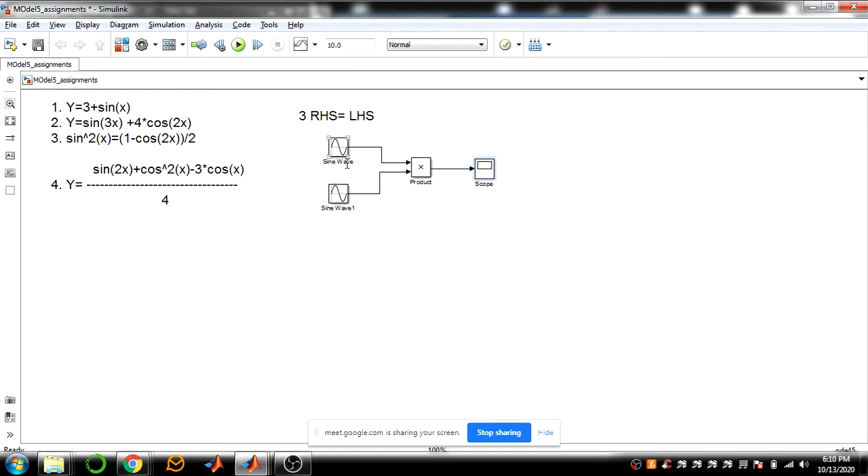Now let me change this parameter setting to 1 second, and the frequency should be 2 into pi, to get it in terms of hertz. The frequency is 2 star pi star 1.

If you simulate this, you will get the RHS side of the output. Let me do this. So this is the output you are getting: sine into sine, sine square of x. So you will get a 2 hertz signal, almost.

Any question on this? How do we get this? There are other methods also. You can use some other blocks, instead of product, to get the sine square of x. You can do the mathematical operation like power operator. Using that also you can get the similar output.

Frequency, yeah, only frequency is 1 hertz, so I'm setting it as 1 hertz only. So it's 2 pi into 1. For both it should be same, sir. Okay, okay.

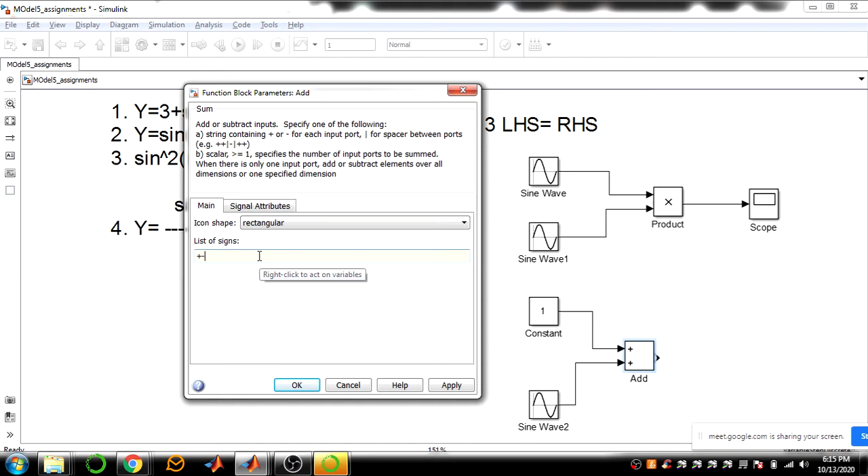Second one should be minus. So then apply and okay. So now you can see here plus and minus. So this will be negated and this will be positive. So now you have made 1 minus cos of 2x.

So the result of this one should be divided by 2.

We can use that, we can use that also sir, we can use that also. Okay, fine.

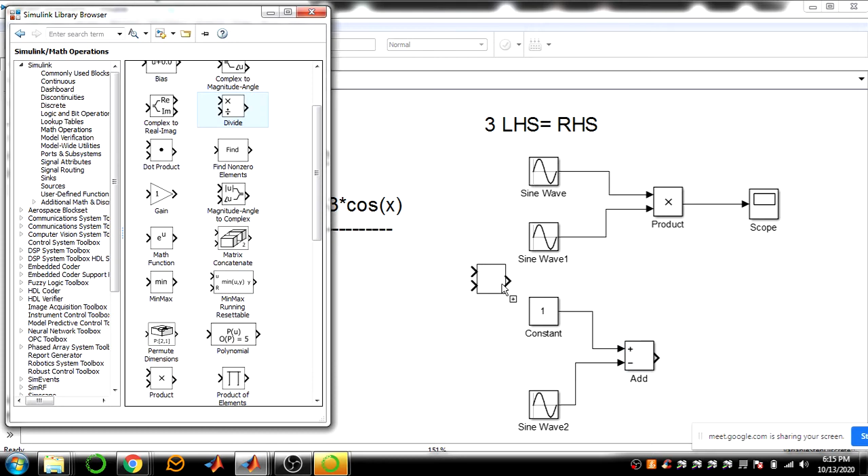So next we will divide this by 2. Go to the divide block. You have a divide block, drag and drop here. So this is the multiplicand value, that means this is going to be numerator, and in the denominator we should have a 2. So again we need a constant block. I'm making a copy of that one, changing the value to 2, and then connect it here.

So you will get 1 minus cos of 2x coming here, and this is getting divided by 2. So then you need to see the output, connect it here, and now run the simulation.

So I'm getting this output here. So this is another oscilloscope.

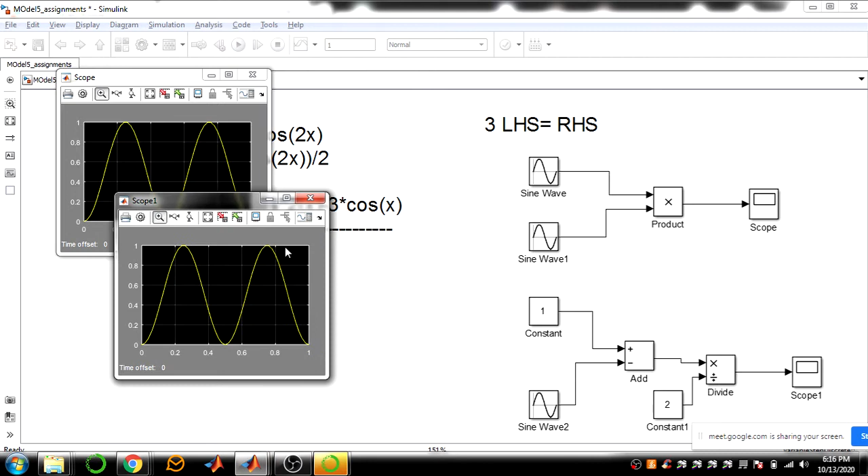So now totally you have 2 outputs. Okay, so both outputs are same, that means we have proved that LHS is equal to RHS. Any questions on this one?

Where, here in division, or here, right? See, it will get multiplied, so that means this will go to the numerator part. So you need to divide this value by 2, right? 1 minus cos of 2x, you need to keep it. It is like a will be multiplied, okay, and b will be divided. That means it is going to be a divided by b. Here you are getting the a term, consider, and this is the b term you consider.

So what will this make? It will be a divided by b. If you want to make b divided by a, you need to connect this b line to the multiplication symbol and the a line to the division symbol. Fine, any other doubts?

Yes, you can solve it. Yeah, you can solve as many models as you want, you can create it here, sir. So there is no end to that.

Okay, so fine, this is one example. Please try other examples if you're not able to complete it.

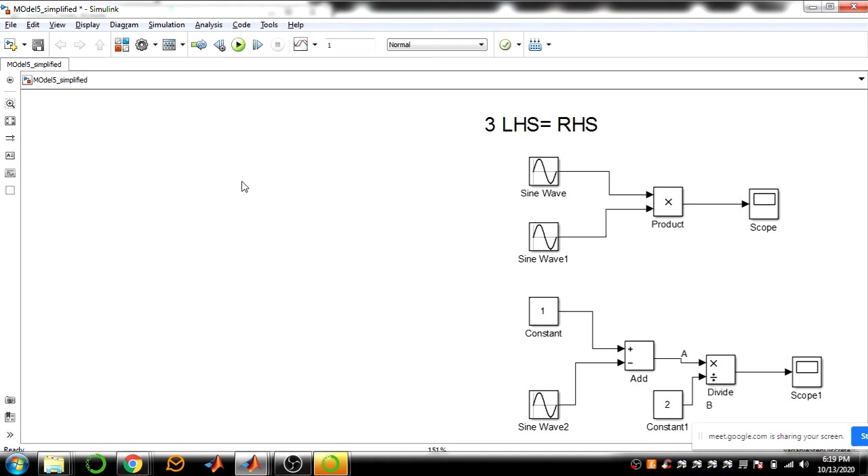So you can select the block and drag them wherever you like to have it. Okay, so now I'm going to simplify this model.

How do you make the parallel connection? I can draw a line from here and connect it again back to here. So that means there are two signals which are coming as sine. So now you are doing the same thing, sine into sine only you are doing it. So if you have any question, let me know regarding this.

You can draw parallel lines like this from wherever you want. So this is one way of drawing the parallel line, that is a reverse connection. I'm connecting from this end to this end.

So another alternate way to connect is, if you want to draw an extra line from this one, you can select that line, hold the control button, and draw the line from wherever you like to. So this is how I can draw it, this way also I can make the connection. So both will give the same result.

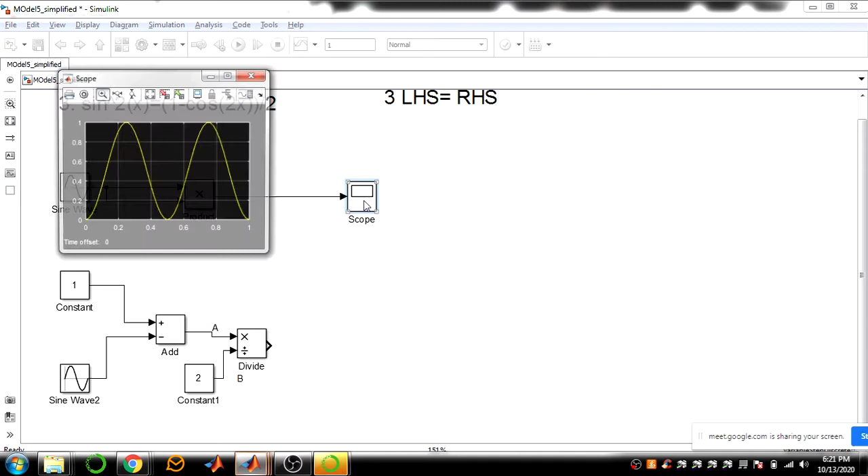So what I can do is double click on scope, and go to the parameters here in oscilloscope, parameters.

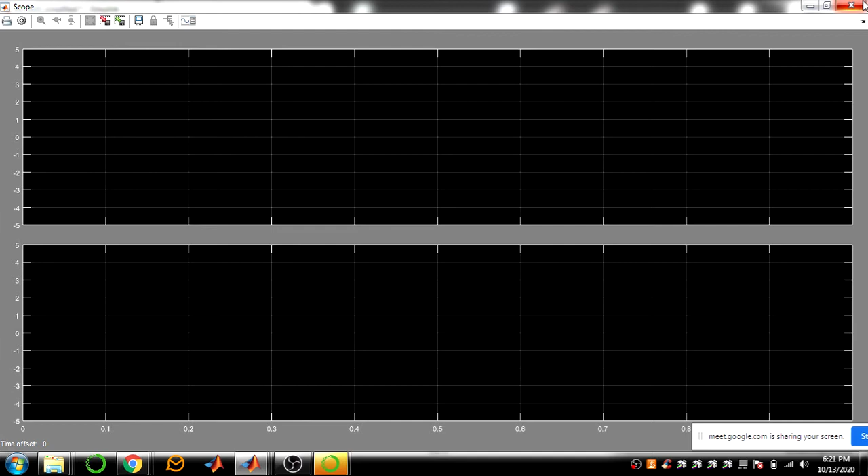So the number of axis option is there. Make it 2, then apply, then OK. So you will be able to get 2 axes. I have connected one of them already here. Let's connect this output here too, so you can easily check the final result and do an automatic comparison. I'll just auto scale it. See, both results are coming same.

See that, so we reduced the model, right? Earlier it was looking a little bit bigger. Still, I'll reduce it a bit more here.

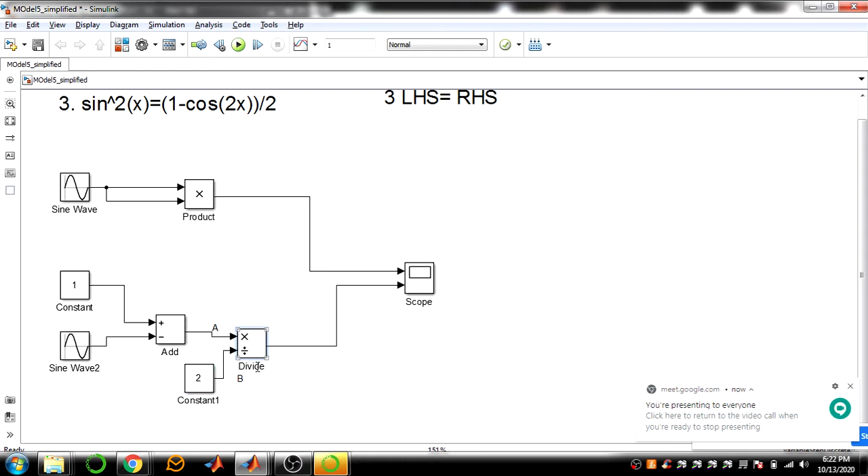See, now I need to divide this incoming output by 2, right? So instead I can remove this divide block.

So what I'll do is take the math operation, the gain block, and drag and drop it here. This will actually multiply the incoming signal. Whatever the input signal is, it will simply multiply with the constant value. So if your constant value is 2, it will multiply the signal by 2. That means this equation becomes 2 into 1 minus cos of 2x.

But what I need is 1 divided by 2, so let's multiply this with 1 divided by 2. Let's do that. You'll get a final output which is the same as previously, no changes in the result. So now the model has been reduced a bit.

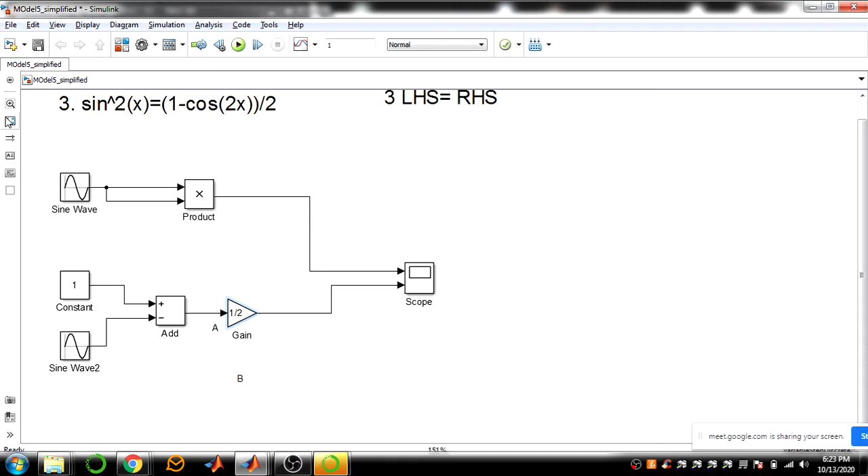So any questions on this?

Rakshita, have any questions? Sajid? Reshma, you joined late, okay, no problem. Harish sir, do you have any question?

Fine, fine. Okay, so let's move on with some other options here.

Here I'm going to show you about connecting multiple signals to the same scope. Apart from modeling this equation, we also learned connecting multiple signals to the same scope, and how to draw a parallel line from the same signal. These are like your electrical signals, electrical wires—you can make serial connections and parallel connections like this. You can draw as many connections as you like from this point.

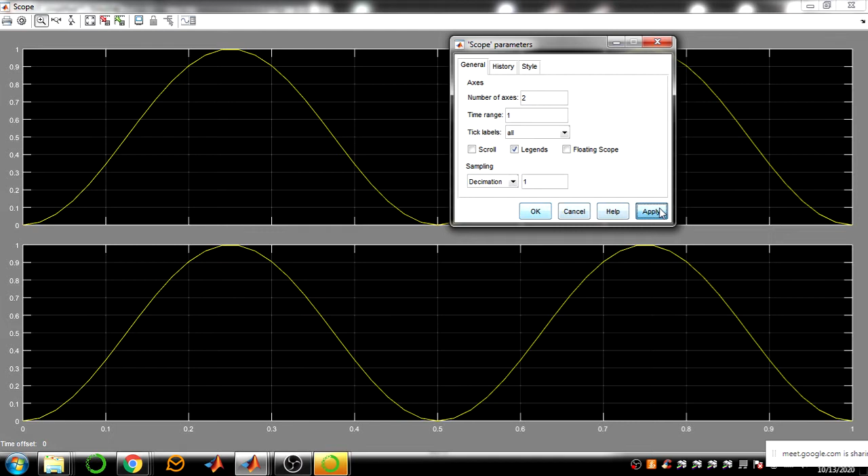You can see here it is showing the product and gain. What it's showing as the outcome is basically the name of the last previous block—that name is shown as the signal name.

If I write something here, this is going to be considered as a comment or naming. Say, here I'll write LHS, and here I'll write RHS.

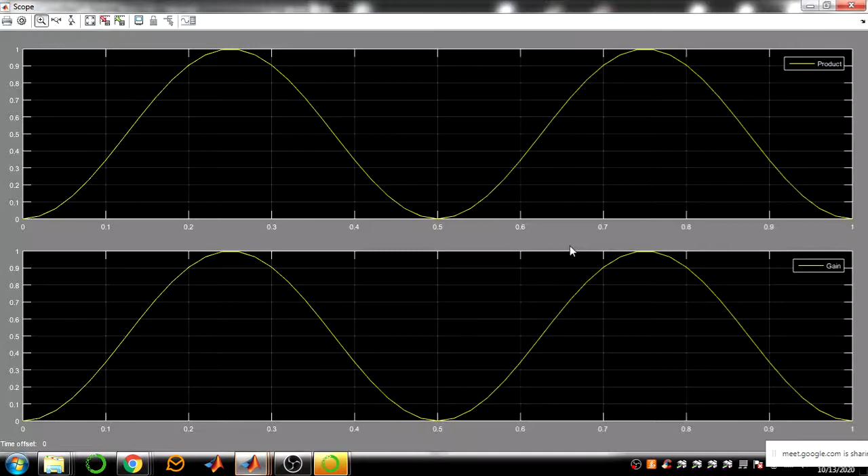What is this—will it show this on your signal? No, right? So it's showing here whatever the name of this signal is. So if you want to name this particular line, here's what you can do.

You can select the line and double click on that line. Then if you name it LHS, it is actually the name given to this line. This will always be considered for this line only—you cannot edit it straight away. So select the line, double click, and name that line RHS.

So now if I run it, the same names appear here: LHS, RHS, LHS and RHS. That's how we can control the labeling of the signals. To name it, select the line and double click on the line to name it.

Fine, so that's some introduction about these signals. Any queries? No queries? So we'll move on to the next example set.

So, like, if we have a signal generated in MATLAB, okay, let me show you—I have this signal.

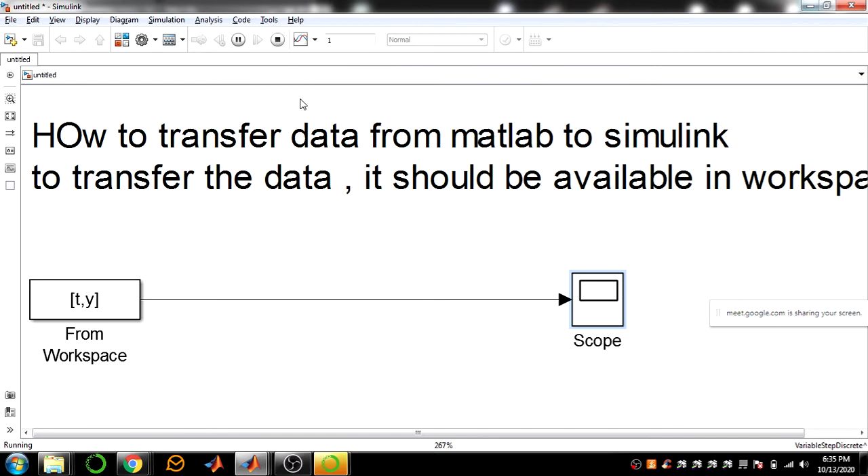Let me simulate it once and see the output. If I auto scale it, you can see this output. So is it looking like a sine wave or not, Rakshita? So then what is the problem here?

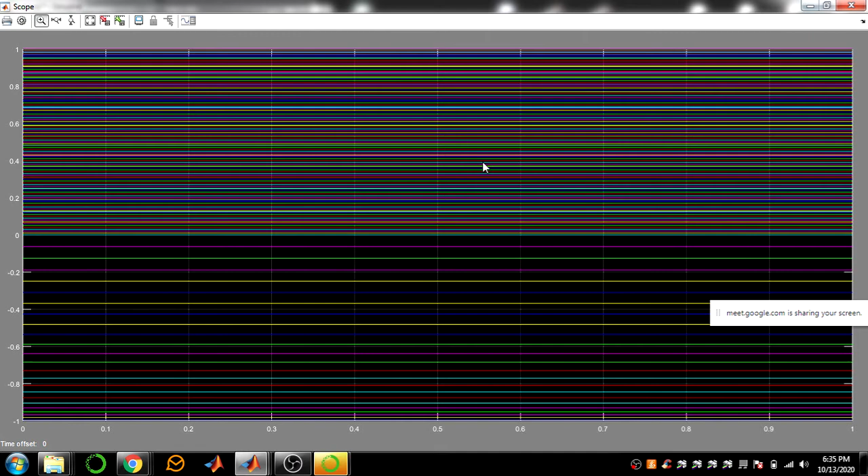The main problem here is, if you look at the signals inside Simulink, they generate the signals in a column. The data will be available in a column vector. You can see that - this T out is the variable from Simulink, and this variable takes the data in one column and multiple rows. But when we generated it in MATLAB, we gave the data in one row and multiple columns. So we need to transpose this data - bring the data into a single column in order to plot it inside Simulink. Only for the plotting purpose we need to transpose it this way.

So we need to transpose the data, that is, we write y is equal to y transpose and t is equal to t transpose. Either we can do it here using the transpose operator, or you can do the transpose operation inside the simin block itself. I'll do it here itself: t transpose, comma y transpose. So then apply and click OK. Now if you run it and click OK, you can see the final output.

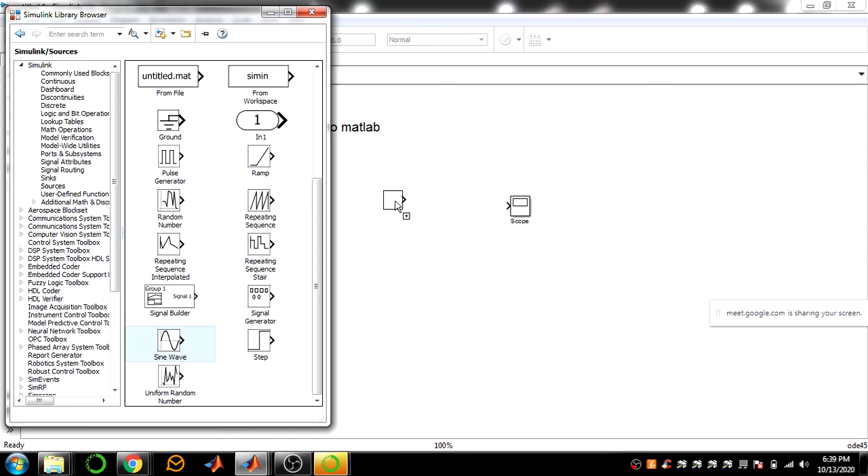So let me take a simple sine wave block. Let me have a scope block and then sine wave block to do the plotting. So let's see whether we'll be able to generate the signal or not. Frequency 1 Hertz, so let us multiply it by 2 pi and then apply and OK.

So let me run it for 1 second. So we got this sine wave as output. Okay, save as 7 underscore MATLAB, Simulink to MATLAB.

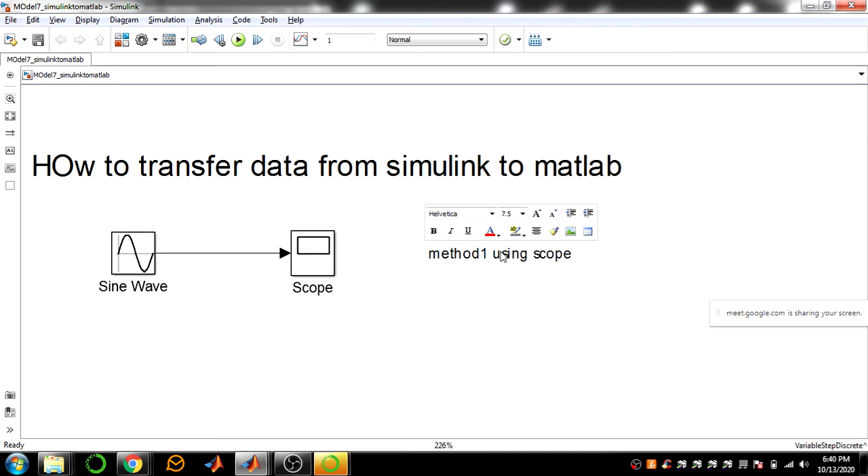So I'll show you, this is the first method, method 1, using scope parameters, that is data logging.

So how to change the Simulink scope properties, Aishwarya? To change any properties, what you will do first, you need to double click on it, then go to the parameters. Okay, so what are the options here available? General. Okay, so you should go to the history here. Okay, see, you have this option. Can you see this? What is this option?

Okay, just click on that. So what is the way, which data you want to save it? So how many signals are there in your axis, one or two? Only one, so then you can change the variable name which you want. Okay, say like I'll take the name as sine, or I'll take it as y, yes, that is y from the Simulink.

Okay, data formats, what are the formats available? Tell me. Array. Okay, then array, so array, if you are using it, if you use array format, it will store only the signal, that means sine wave samples will be stored, it will not store the time axis. But if you take structure, it will not store the time axis. It will also store only the signal axis, but structure with time means it will store the time as well as the data points also.

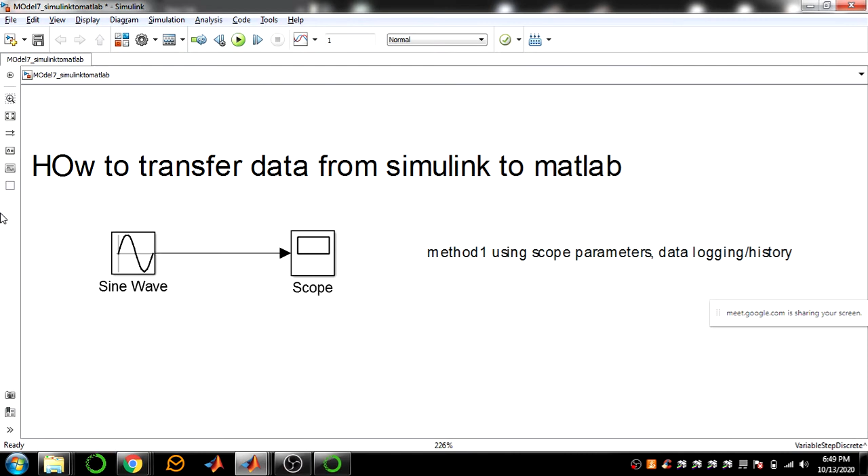So that is one way we can do it, and another way I'm going to tell you here. One second. So this is one example, another one.

So this is only when we have a scope block. Let's say I don't have a scope block - in that case, what will you do? Say I have another block coming in between, let's say a math operation block is there. Let me add a simple gain block, with a gain value of 5.

Now Adarsh, tell me how can I get this output data transferred to MATLAB? If I'm transferring using the scope block, what happens? I get the final output, right?

If I open it here and go to parameters and history, it automatically renamed it as ys1. Then apply. So if you run it, you'll be able to get the final output, that is ys1, which is the multiplication by a value of 5, so that multiply maximum value goes up to 4.22.

But what I want is to get only the output before this operation. I want to collect those samples. How do you get it?

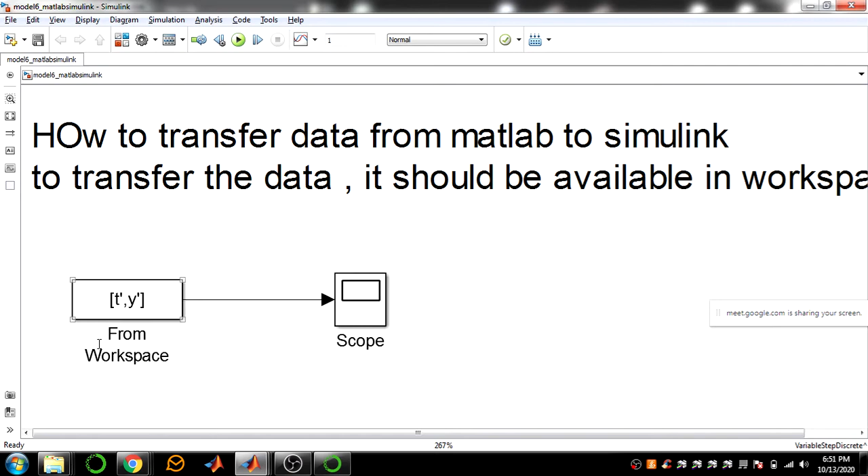That's the extra time consuming task. To avoid that, if you want to collect data, just like we had a sim-in block here from workspace block, we have a To Workspace block also. Let's see that.

Sources... now sinks, To Workspace, there is a sim out block, so I can take it. Either if you don't have a scope block, you can directly connect it here. But now I want to connect it in between. Let me connect it in between. So using this To Workspace block, I can send data to the MATLAB workspace.

If you want, you can change the variable name. I'll select it as YW. Here also you can choose the format you like. I'll select the array format. Then apply, OK, and run the simulation.

So you have the YW variable which collected your samples, Y sample. This is before you compute the multiplication, that is the gain operation, and this is after doing the gain operation. So this is using the scope block, and this is using the To Workspace block.

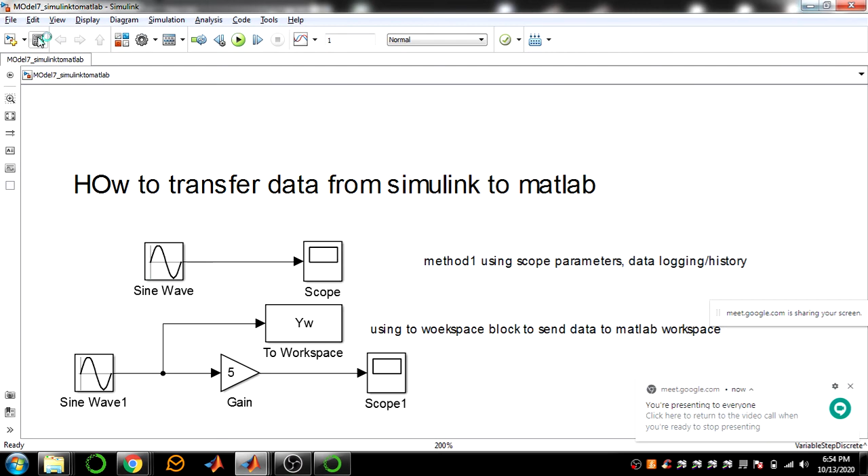Let me show you how we can generate multiple frequency outputs using a sine wave block. So I have a scope block and a source block, where I took a sine wave block. Connection done.

Do not give spaces when you are using the file name. So here I'm generating these signals up to 1 second.

I'm going to the simulation model configuration parameters and changing the step size to 0.01, instead of the normal 0.02. So now I'm generating it as 1 by 100, more number of samples. Apply and OK.

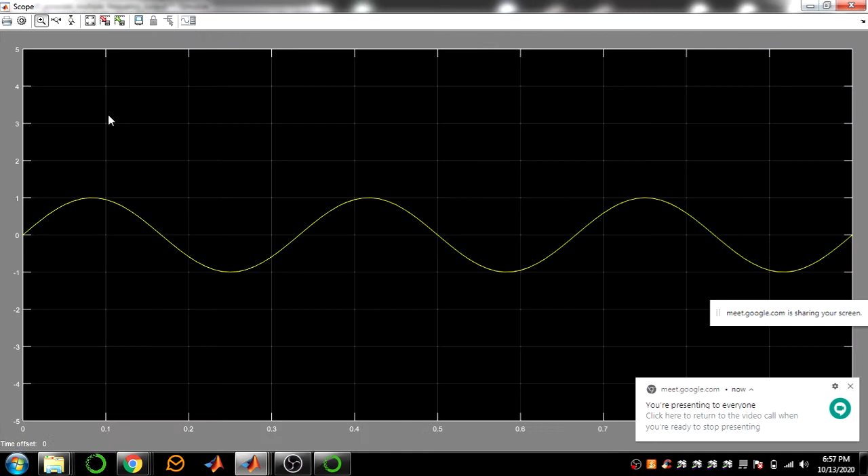Step size is 0.01 I've taken. Now if I generate this with frequency as 2 star pi star 3, what is the frequency of the output signal? So what is the frequency of the output signal, Mamata ma'am? 2 pi into 3, what is the expected output? It's going to be a 3 hertz signal, right? So we've got a 3 hertz signal, which has generated a signal with frequency of 3 hertz.

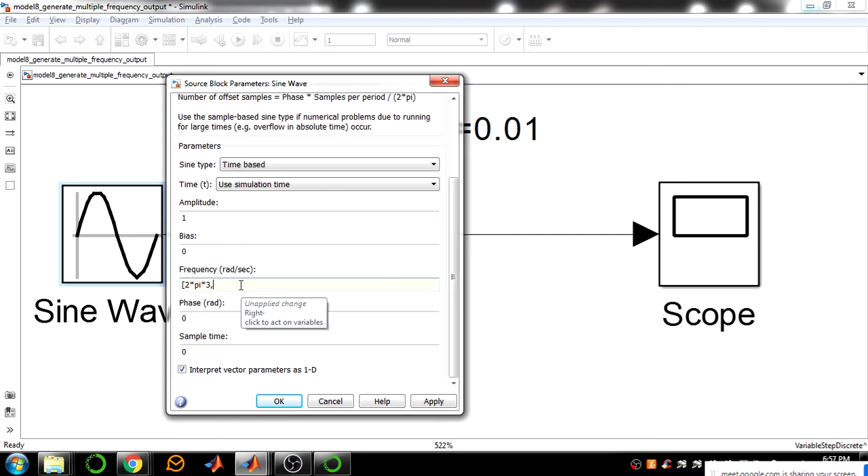Say you want to generate more signals, you can also do that. How? Here I write it in square brackets: 2 star pi star 5, comma, 2 star pi star 1. So here I'll be getting a total of 3, 5, and 1 hertz signals, total 3 signals generated. Apply and OK. You should write it in square brackets in a matrix format.

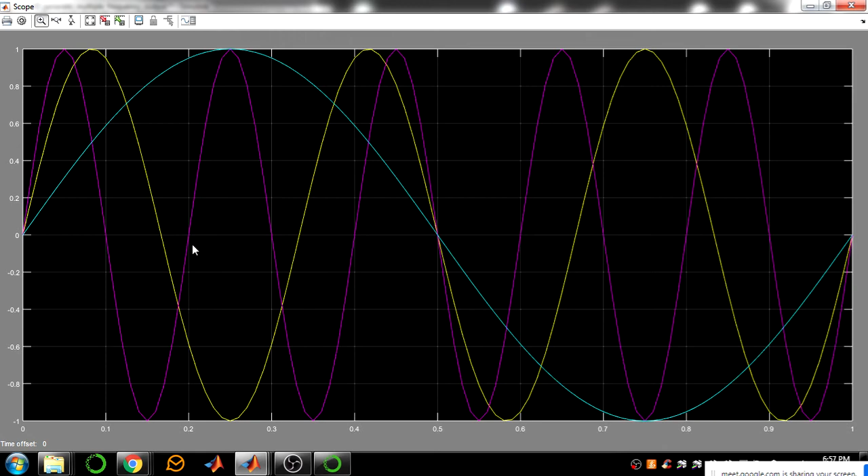If you run it, you will get 3 signals as output, you can see that. They have different colors marked. So this is how you can generate multiple signals using a single block, instead of having multiple sine wave blocks, we can generate it using one simple sine wave block.

Generate multiple signals with a single sine wave block. So fine, that's how we are able to generate it. Now, okay, next, show...

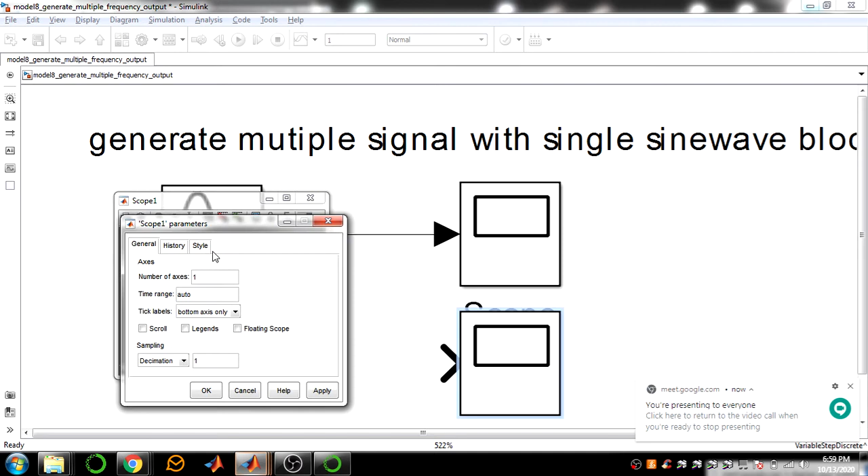Now show in this one line how many signals are getting transmitted. So how do you extract the 3 signals individually? I want to separate them out. They are in a single plot, right? I want to plot them in individual axes, like three different axes to see all three different signals. What is that operation? In a single line you have a total of 3 signals getting transmitted. Now I want to separate them. How do you separate it?

So what is the operation you normally perform when you want to separate signals which are combined? There is a particular operation name you call that operation. Can anybody guess the operation?

No sir, subplot is for plotting, but now the signals are in one line, you had 3 signals getting transmitted. I want to separate them. So now 3 signals are combined, we want to separate it. So what is that operation?

So there is one simple operation which we can think of. Rohit, can you try? Yes, somebody answered it. Yes madam, mux and demux.

Very good. So you have the particular signals. I have this one signal and I want to split it into three outputs. Actually, in this one line you have a total of three signals going on. So three signals are there.

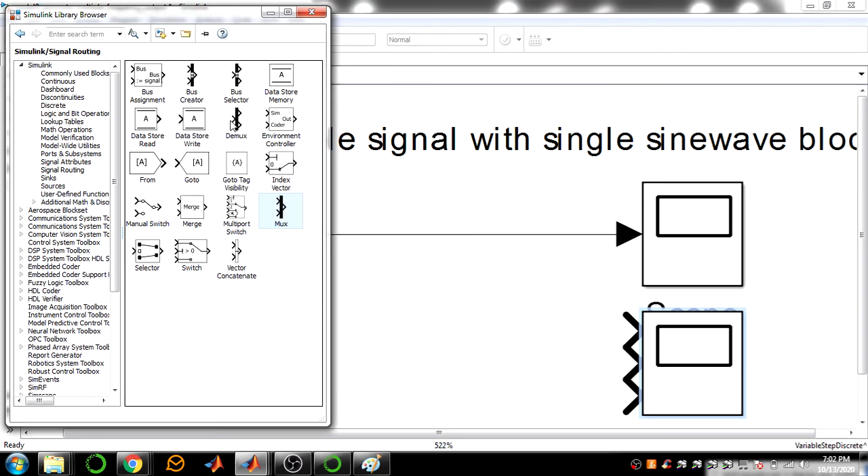Go here in the libraries, signal routing. You have a merge, selector, switch block, bus, mux block. Similarly, you have a demux block, which takes one input and gives multiple outputs. So draw a line from here to here.

Or what is the other way of connecting the signals? Select this line, hold the control button and draw the line here. So how many outputs does it have to yield? Currently, by default, it's going to give two outputs, but how many outputs do we actually have here? Three outputs. So let's increase the number of outputs to 3.

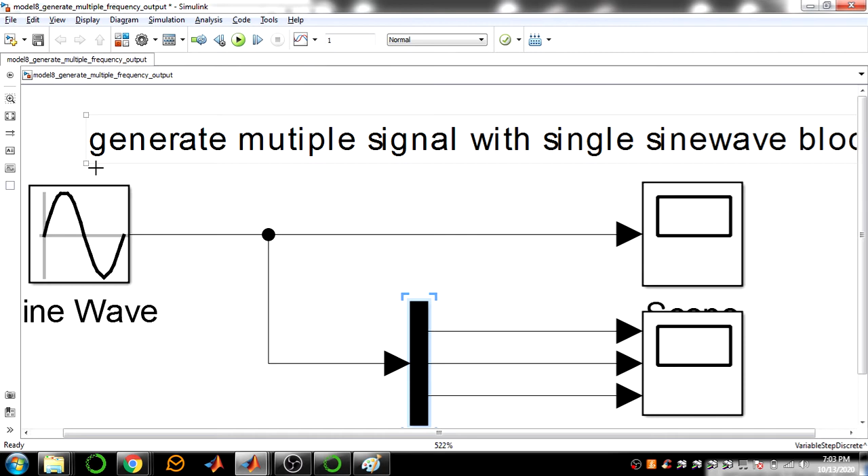So let's do this operation. Now what I'll do is select this block and click on this block. The connection will happen automatically. Let's run this operation.

Now you will be able to see all the three signals separately. You can see that this is a 3 Hz signal, 5 Hz, and this is going to be your 1 Hz signal. The scale is 0 to 1.

So if you'd like to add the axis to each one, add the axis to all, like tick labels 0 to 1, 0 to 1, 0 to 1. If you like to name them, you can name them. This will be based upon the input, the signals will be split. First signal will be 3 Hz, second one will be 5 Hz, third one will be 1 Hz. Same way you have the split here.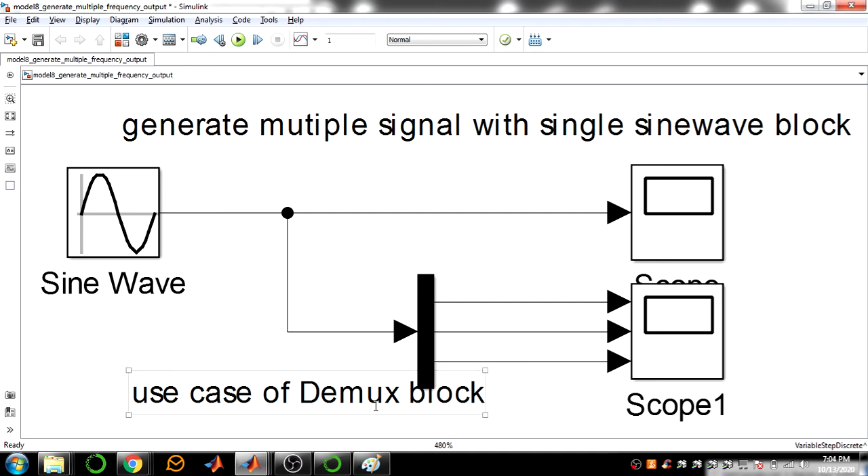So now we saw how to generate multiple signals and the use case of your demux block. Any questions here? Shu, do you have any question?

Okay, let's see here one more thing about this. One second. So we are going to create a general model where we will see a general example, which covers topics like labeling, rotate, flip operations.

Okay, so let's... one second.

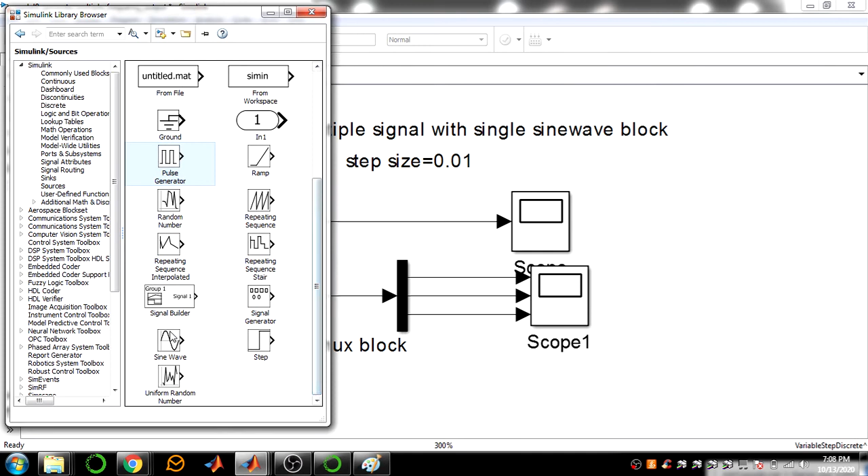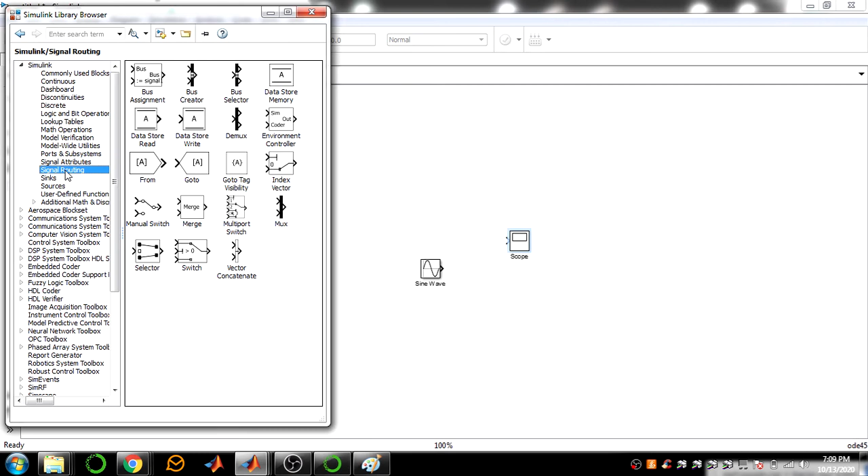Here comes an example where I'll just drag and drop a few signals here. Let me take a sine wave block. Instead of sine wave, I'm going to take a pulse generator - actually I'll show you pulse generator separately, so let's go with the simple sine wave itself. And I'm going to take a Sources, Sinks, Scope block. Signal routing not required. Let me take some math operation - a gain block, addition. Sources - I'm taking a constant block here.

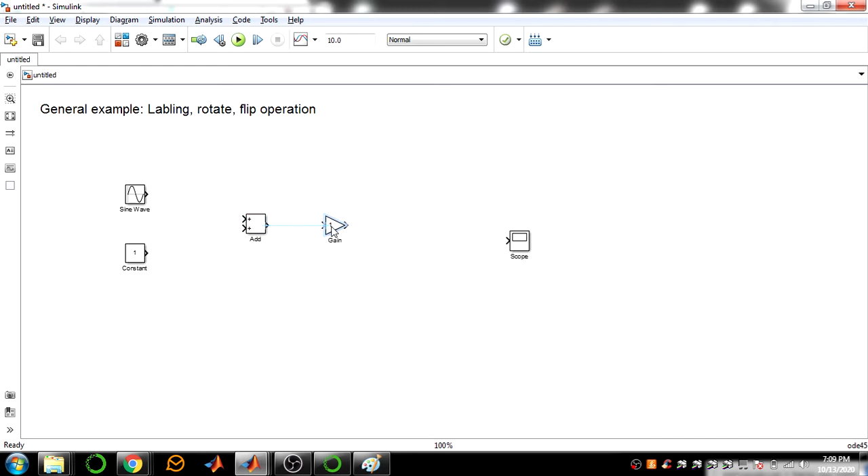Okay, so this is some random operation which we are performing here. I'm connecting these two blocks here, and this one here, and this one over here. So I want to see these two results output here. How do I see these two results output? So this is going to be 1 plus sin of x, that is 2 star pi.

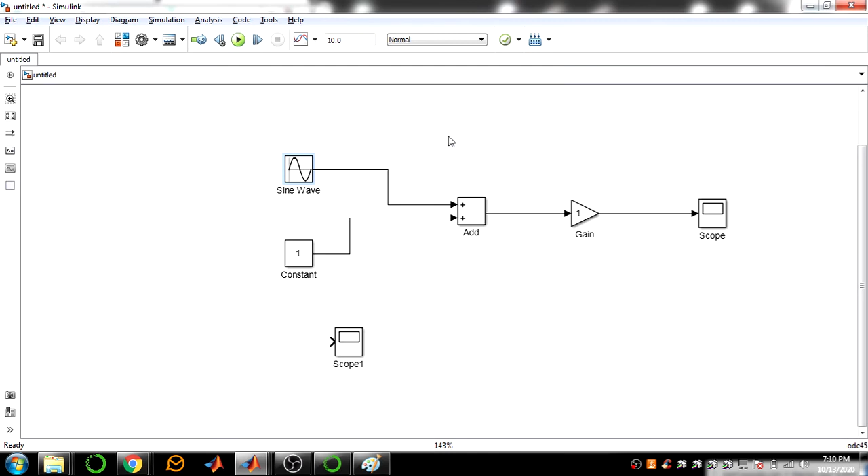So this operation I'm doing for 1 second, and gain I'm taking as a 2 hertz signal. Labeling already we discussed - you can go to the parameters and enable legends to get the labeling, apply to get this. So to label, you will select the line and write it as the final output.

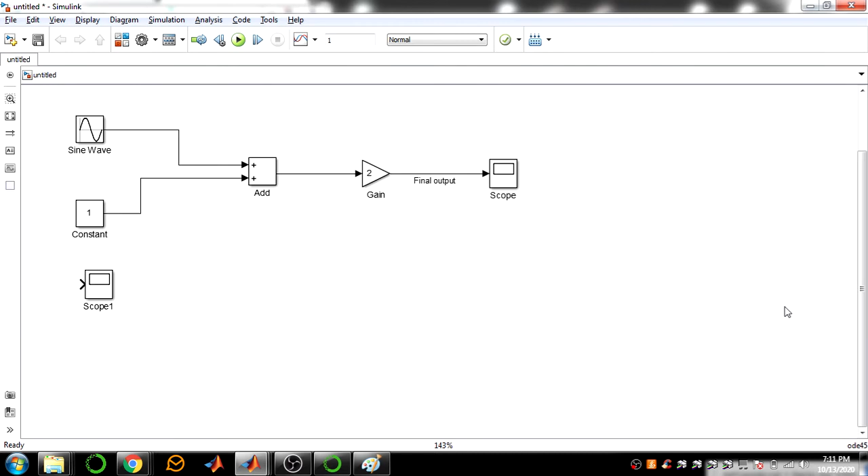In between, I want to see this output. So if you want to connect the scope block here itself, you want to see the output and keep the scope block here only - how do you see that result? For that, what you can do is flip this block. Or else I can rotate this block, and connect this block over here itself directly.

So to rotate, two options are there. Use Control plus R button to rotate, and to flip, use Control plus I button - these are the shortcuts.

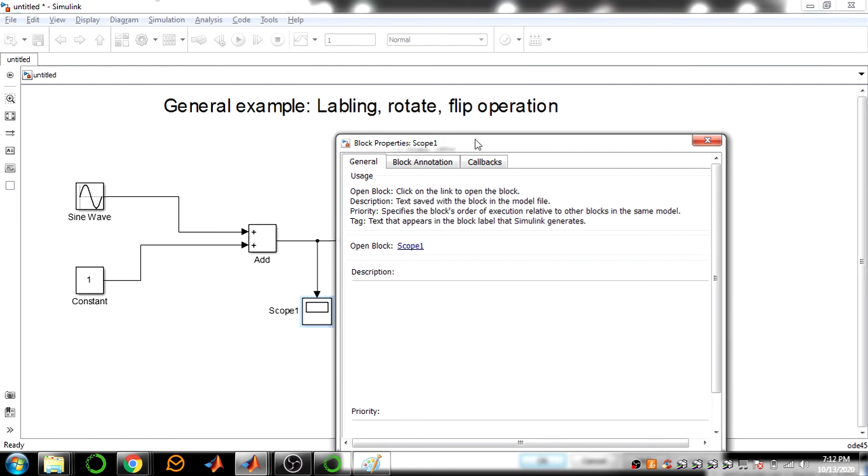Otherwise, you can right click on the block and go to the block parameters - here you have the options rotate and flip, clockwise and counterclockwise, flip block, and flip the block name. You can do those options. So if I want to flip the name also, I can do that.

So if you want, you can do that flipping of the name, rotate, flip the block name. So this came this side - you're getting the same result, same output, no change in between the output. So this is how it's going to be, this labeling and rotation operation.

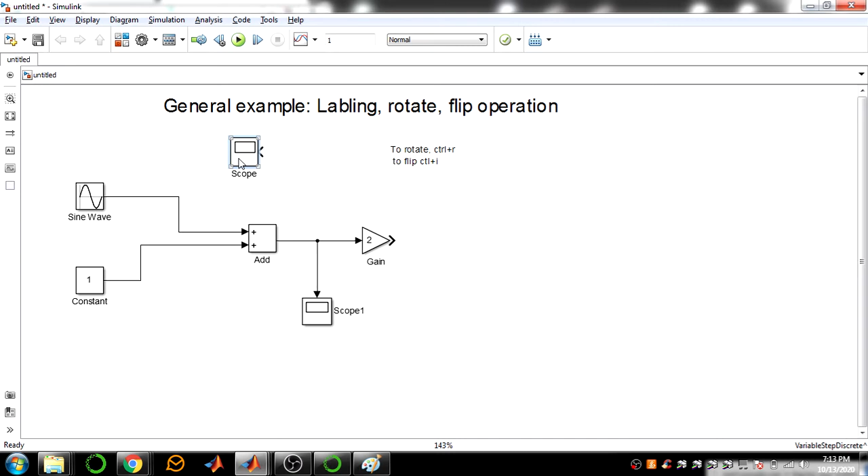I'll show you the flip operation. Let's say I want to connect this output block also here, instead of here - I'm going to connect it here. So what should I do? I need to keep this flipped - I'll type Control+I, so it gets flipped. Then where will you connect this block? I need to connect it here, so rotate this - that means connect this block from here to here, and then finally connect your output block here.

There are many cases, like when the model complexity starts increasing, you will start using this kind of option so that you can have a clear view of your block. So this is the final output coming here - let me drag and drop it here. This is your in-between output.

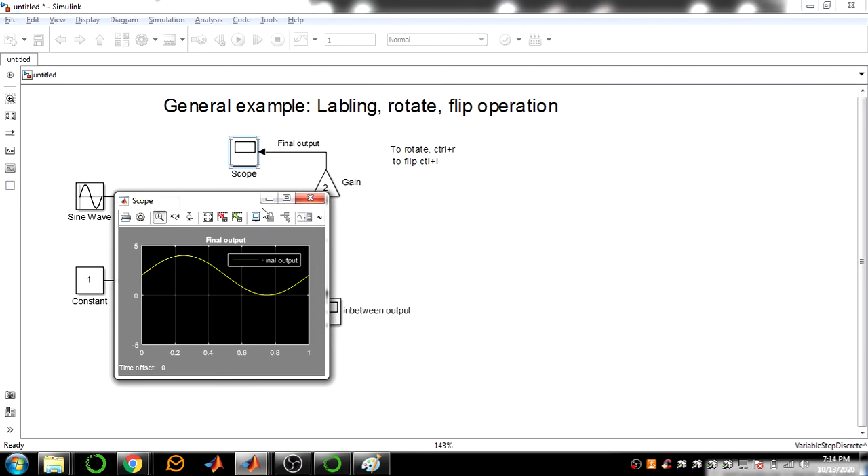So let's run this simulation. Same output only we are getting, no changes in the output - here also again we are getting the same output. So this is how you can do the labeling, rotate, flip operations on your block sets. Any of the blocks you like to have, you can do this operation - labeling, rotate, and flip operation. We'll actually use this in upcoming examples in the upcoming classes. Any questions on this - flip, rotate operation?

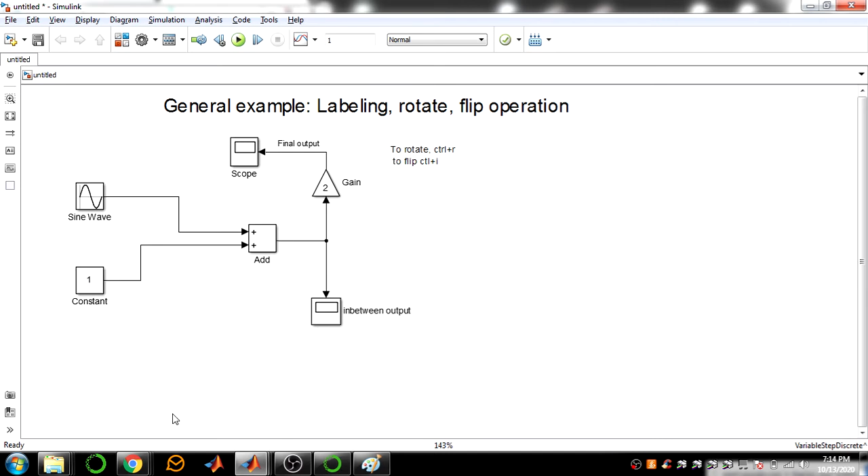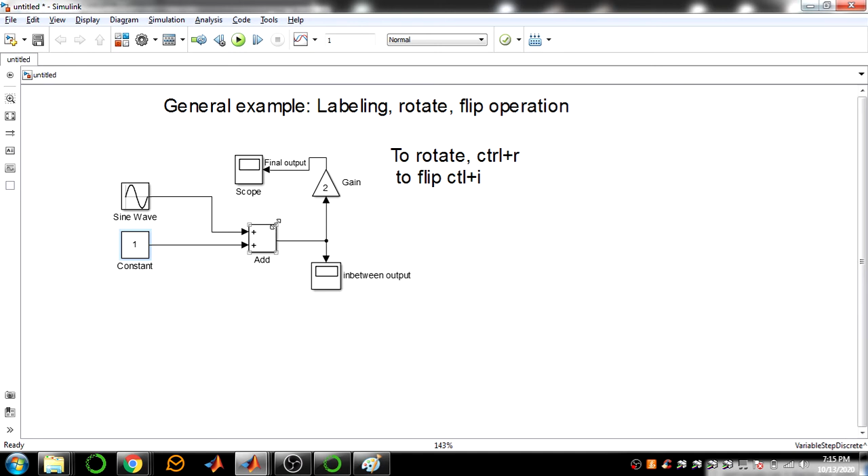So try to solve this kind of operation, like try to change the view of your models and all, so that you will have more control over the Simulink block sets, and making the modeling easier. You can change the alignments like this, you can drag and drop. So all these things you can control, how we select the line, how it gets connected. You can squeeze that line, you can expand the block sets. So all these things you can do, so that you can have a clear view on your signals.

So let's, yes sir. Okay, thank you. Okay. Labeling, flip, rotate. So this is the

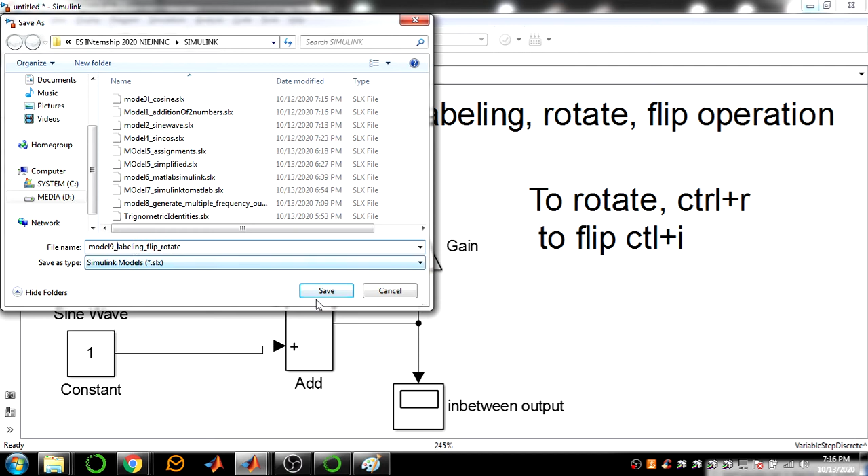So these are a few basics about your Simulink block sets. Okay, so let's move on to the new example case.

So in this topic we are going to discuss about the subsystem and masking. Today I'm going to discuss about subsystem creation, and tomorrow we'll see about the masking operation, how to perform the masking on the block setup.

So for that I need a model, which I'm going to create now. Before that, one more thing I just want to tell before I go to the subsystem. Yes, I'll tell that thing with the subsystem, so not an issue. So let me open the assignments.

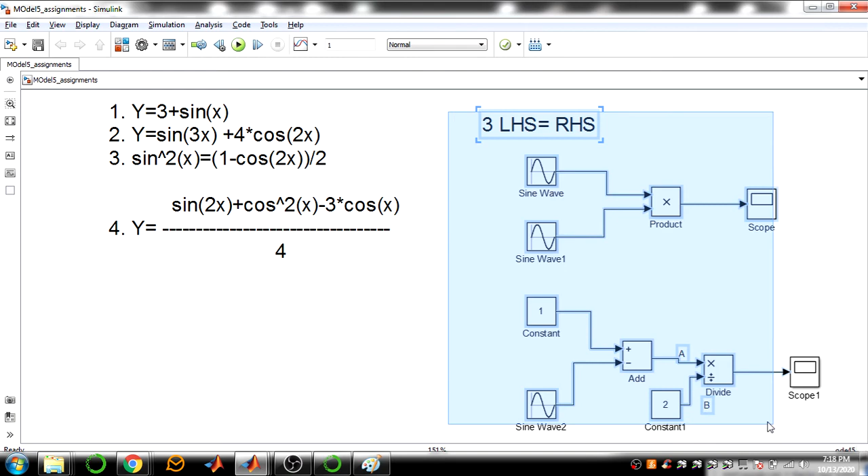Okay, so let me try this model: sine of 2x plus cos square of x minus 3 into cos of x, whole divided by 4. Or let me take this example itself, which we have already modeled. So I'm going to consider this model itself. Let me build this model.

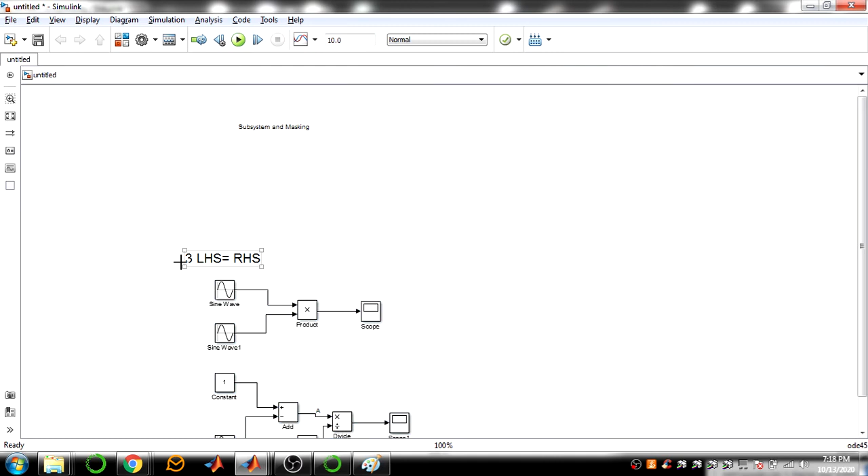I've taken the copy of this and I'm going to put it up here. Give me a second.

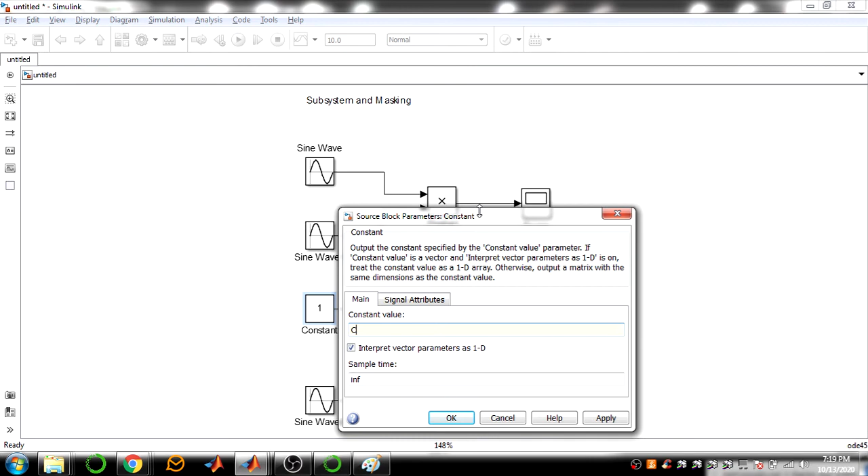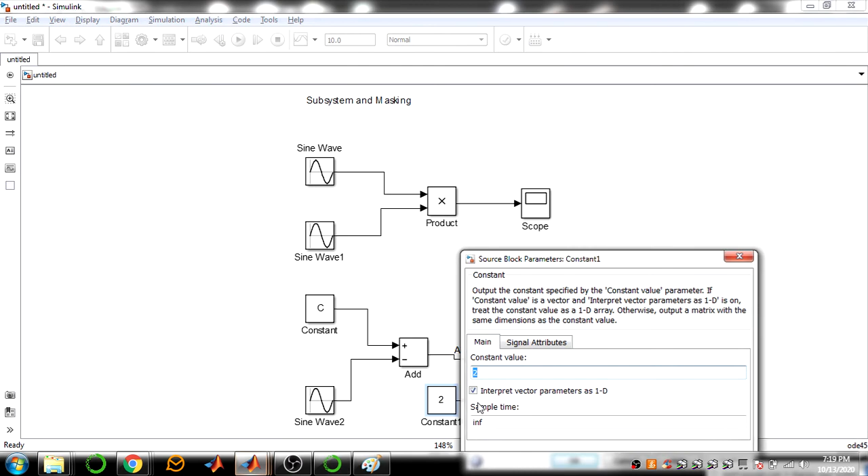Okay, so now the question is, I have this block, right? I can actually provide this value for the constant value. Like I can write a variable as c, constant value as c, and here what is the frequency of this block? So what is this value? This is c2. Say I rename something like this, c1 and c2. This is c1 and c2. What are c1 and c2? They are the constant values.

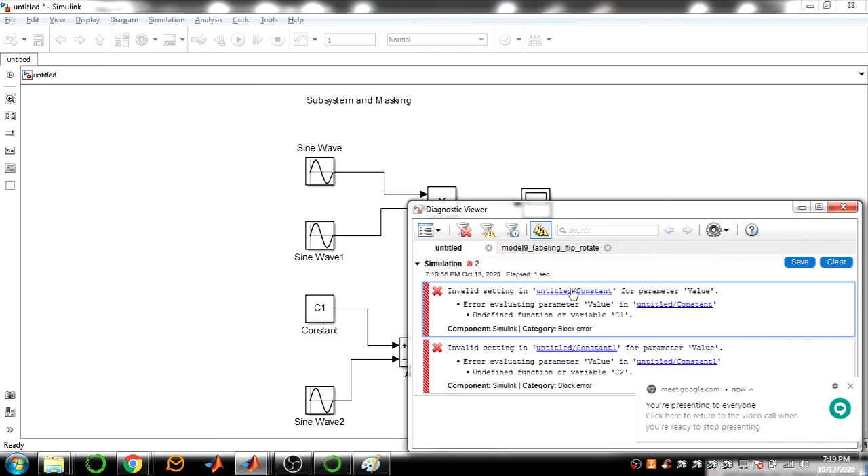So whether they are known parameters or unknown parameters as of now, Chetana? So, as of now, whether c1 and c2 are known parameters or unknown parameters. Currently they are unknown parameters, because if I run the simulation for 1 second, I'll get an error because it doesn't understand the c1 variable and c2 variable, right? So what we can do is provide the c1 and c2 value from the MATLAB workspace.

So that is one option we can do it here in MATLAB. We can give the variables, like if the variables are provided in the MATLAB workspace, Simulink can easily read those variables, like c1 is equal to 1 and c2 is equal to 2. So it automatically reads these two variables from the MATLAB workspace. Sorry, this is not required. Right, this one. So now if I run it, it doesn't throw any error, and it gives me the final output.

Okay, so let me make only one scope block. Changing it to 2 axis. Okay, so any other thing we can do is it can read the data from MATLAB automatically. So that's one thing.

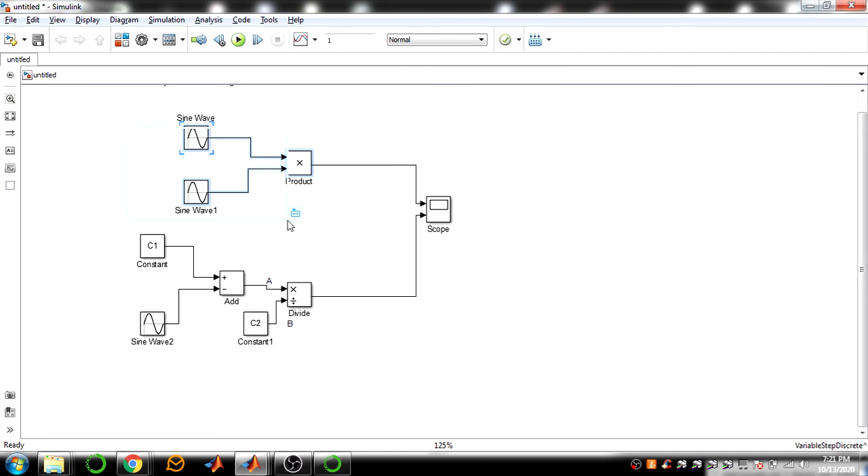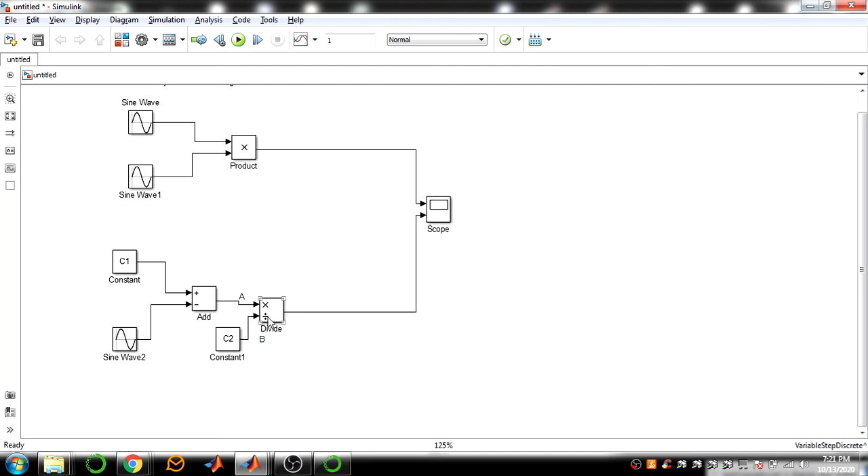Okay, so now Chetana, how many blocks are there totally here on the top and bottom? How many blocks are there this side? Here, 1, 2, 3, 4, 5. Okay, so what is this operation doing? 1 minus cos of 2x, whole divided by 2, right? So this is the operation these blocks are performing.

Okay, so now tell me, if I had to repeat this operation somewhere else, what would you do? Yogesh? Yes? You can copy the... No, I'm not able to hear your voice. Okay, you can copy that block. Okay, fine, good. Ramya, so what would you do?

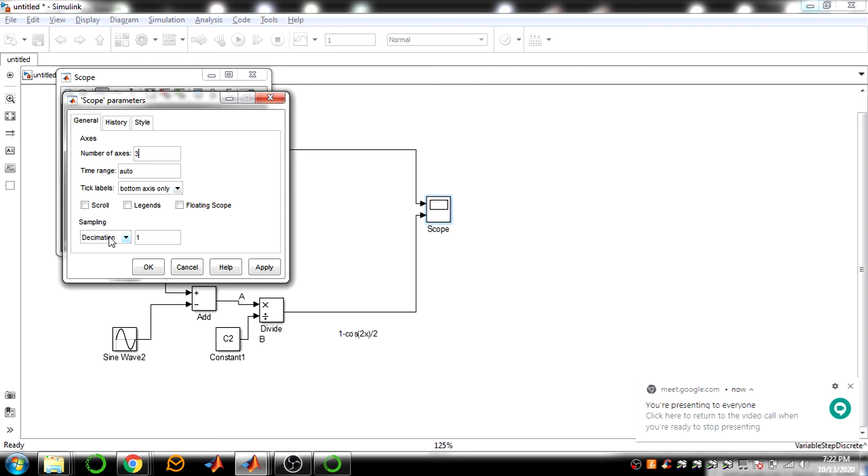If I need this operation once again, say I increase the number of axes, 2, 3, so I need to perform one more operation. Currently this operation makes sine square of x, and also performs 1 minus cos of 2x, whole divided by 2. Now I want to do one more operation, 1 minus cos of 2x, whole divided by 2. After doing this operation, I need one more operation performed on this one, say a plus operation, just as an example case. So imagine you are doing this operation continuously.

So whole divided by 2 into 4. Now what will you do? You are going to copy this operation, right? So what is the solution? Like Yogesh said, he will be copying it. Okay, so now Ramya, what will you do?

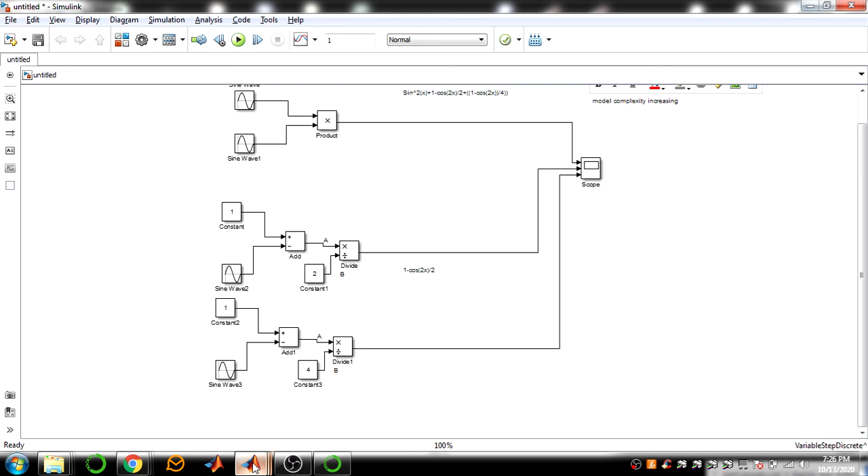Like when you have code complexity to be reduced, how do you bring modularity in your programming in MATLAB? I'm asking, if you have a repeated operation to be performed, will you write the same program again and again, or will you find some alternate solution?

Yeah, what is that solution when you have a repeated operation to be performed? Okay, Priya, can you guess? When you have a repeated operation of the same code, what usually do we do? Priya... Rohit? Yes, we will do the loop.

Okay, fine, one answer. Now I'm not saying it is an iterative process, repeated operation of the same thing at different instances, so then I cannot use the loop, right, Rohit? Yes ma'am. So normally what we do is we call functions, right?

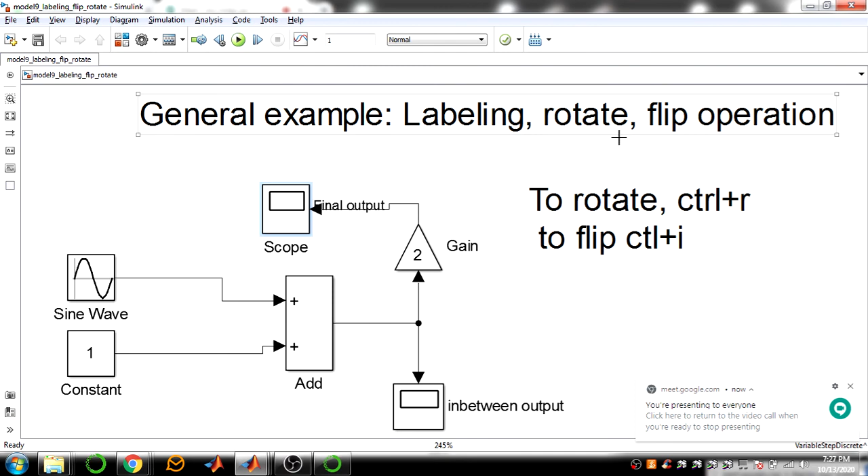So we put the same code in the form of a function. Instead of writing the same code again and again, you just make a call to the same function with changes, whatever parameters you want to change. Like you can give 3 at the first instance, and at the second instance if you want to give the value as 4 or 5 or something else, you can do that. So that's the good thing about using functions.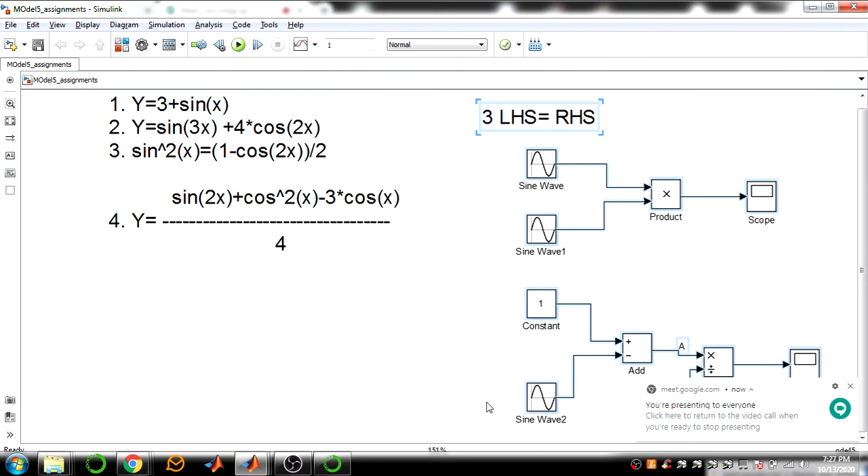Same way here, in case of your Simulink block sets, when you want to perform repeated operations again and again, to reduce the complexity of the blocks, we can create a subsystem. We can go for the subsystem to reduce model complexity. We will use subsystems. Okay, so what will that bring us?

So you have this block set which you want to bring as a subsystem. What will happen is I'll select these blocks, and subsystem, and what you will do is also do the masking. Tomorrow I'll explain about masking. Let me complete here about the subsystem today. So how do we do it?

Just select the blocks you want to make as a subsystem. Select these 4 blocks, then right click here. Just create subsystem from the selection. You can see that, so now I'm doing this operation - create subsystem from the selection.

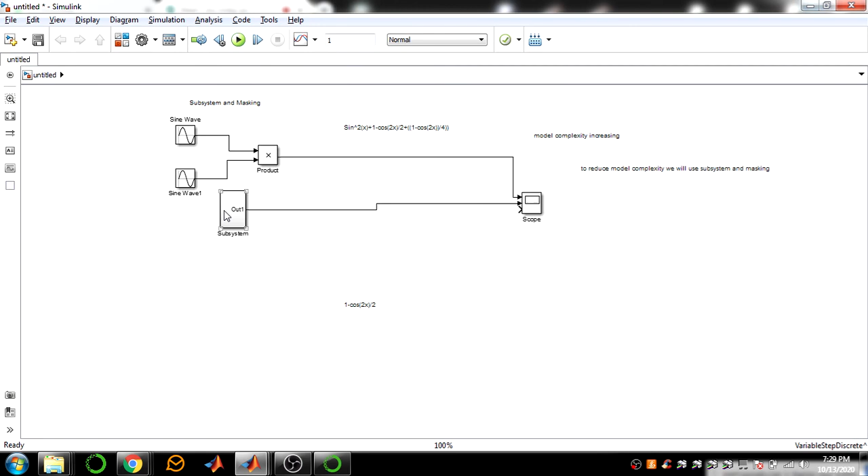You can see here, so now if I have this block, just make use of this block once again - take a copy of this subsystem. Instead of the whole block, just take a copy of this block once again. Now if you want, you can create this block in a separate block and add it to your library, and then you can call that block whenever you want it.

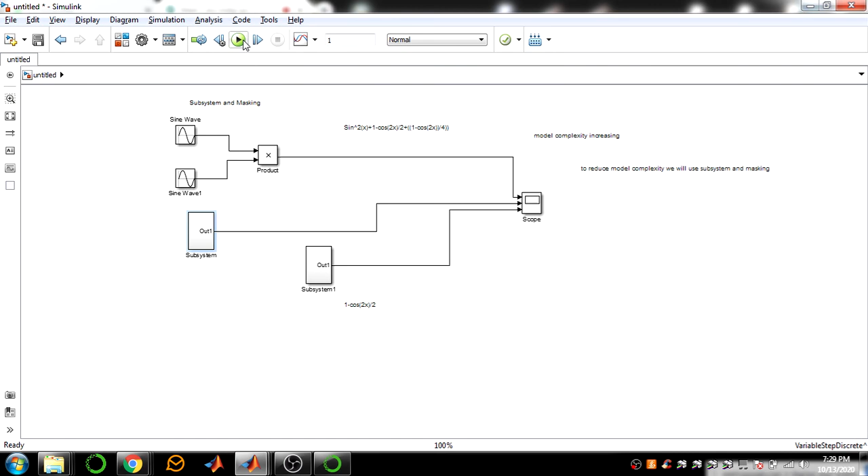So if you double click on this, it's showing what this operation is actually doing - it's doing the same operation, so it doesn't give any wrong results again. Okay, fine, run it. So you are actually getting the same output here, no changes, but it has a reduced block count. So at the front end it looks like the model is simple to us.

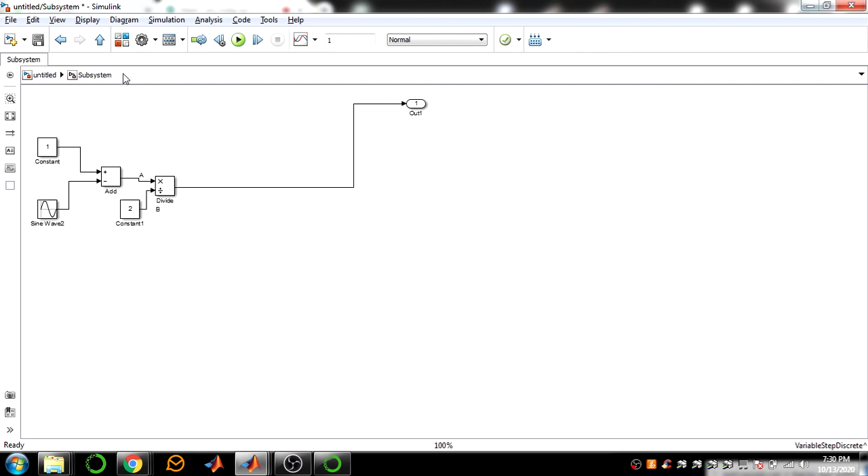So what is the advantage of creating a subsystem? It reduces the complexity, so we can easily debug the blocks. That means if there is an error, it shows which subsystem the error is in, so I can go inside the block and check for the errors inside that block and correct it. So that is one advantage of that. So yes, if anyone has any questions.

Fine, sir. Okay, fine, fine. So that's about the subsystem. Any questions? Any questions on this one?

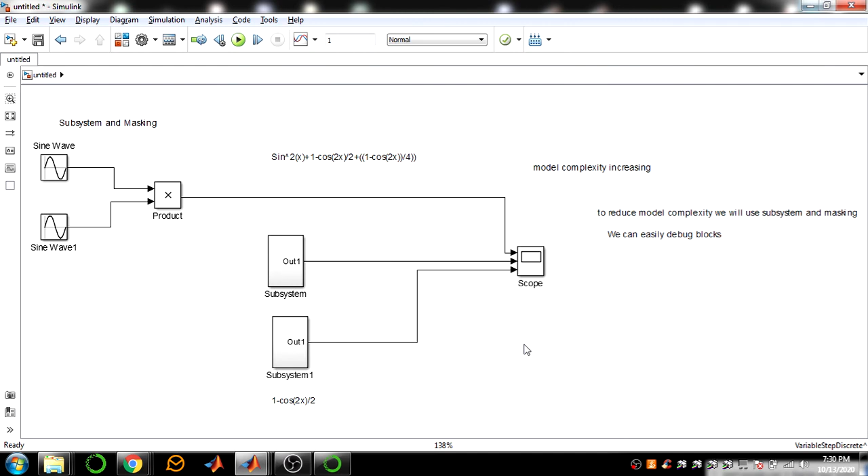No, fine. So even if you want to create a subsystem for this block, select those blocks which you want to bring under the subsystem. Select these blocks, now right click and create the subsystem. So you can name that.

What is this block? This is for sine square of x, so that the end user will get to know what operation you are performing. And this operation is for 1 minus cos of 2x, whole divided by 2. Like that, you can start giving names for the block sets.

So that's about creating the subsystem. Model 10 is about creating a subsystem.

Now inside here you can change the parameters. You can write C1, and I can write this as C2, and here I'm writing the frequency F, frequency as FC. This is for the cosine wave frequency. Okay, apply it.

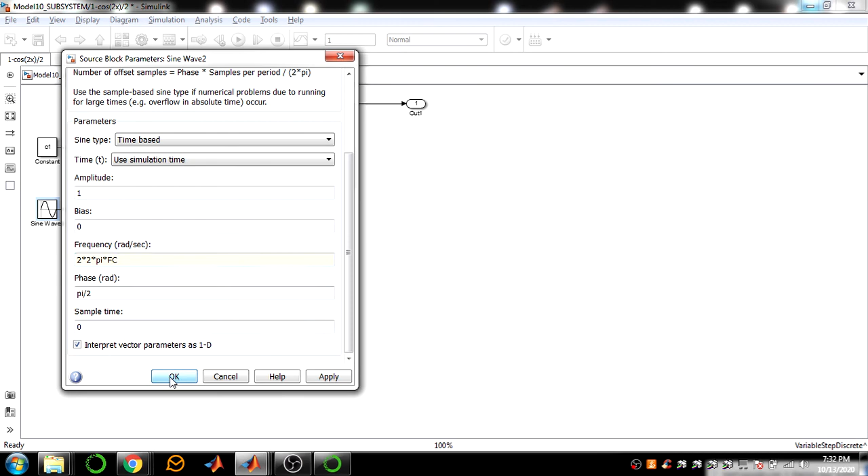So if I run these things now, what will happen? Yes, it says error for which parameters are expected: error, C1, C2, or F.

So already we have the parameters C1 and C2. For F it will show the error, because it is throwing the error for the lowercase c1 — it is case sensitive, variables are case sensitive.

And if I go here, C1, C2, okay, so I need to provide the C1 value, C2 value, and F value, F equal to 1.

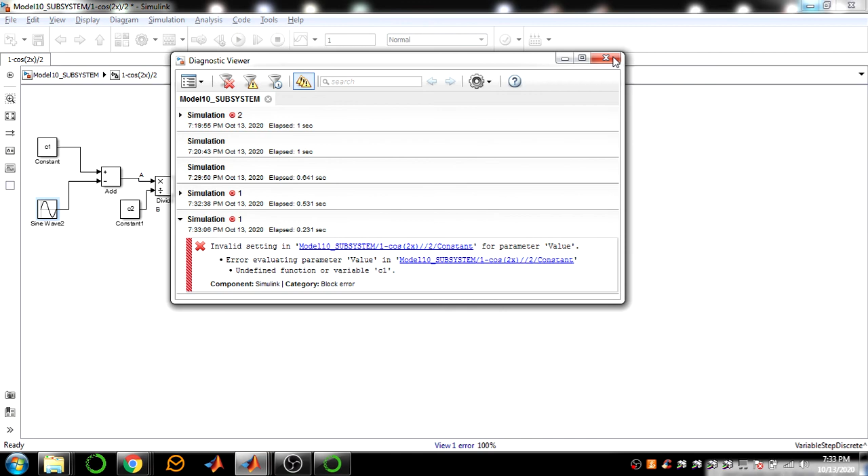So now you will be able to get the final output. It is lowercase c2, okay, C2 is not there. C1 equal to 1, C2 equal to 2, and F is already there.

So let's run the model. And FC, it is the frequency variable name, FC equal to 1 Hertz. So now I'm running it.

So did you find this comfortable? Or going here and changing the parameters is comfortable? Or setting these variables and changing the parameters in MATLAB is easier? Which one is comfortable?

So direct is comfortable. But Ramya, I'll ask you one question. Okay.

Direct is more comfortable than doing this, because in this method you need to remember all the variables, right? So if you make a spelling mistake, the output doesn't come, and you need to know all the variables. Only then can you do the operation.

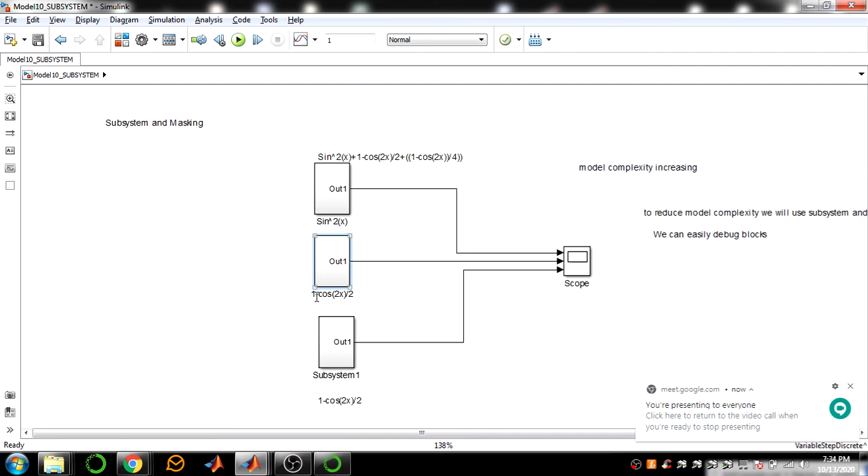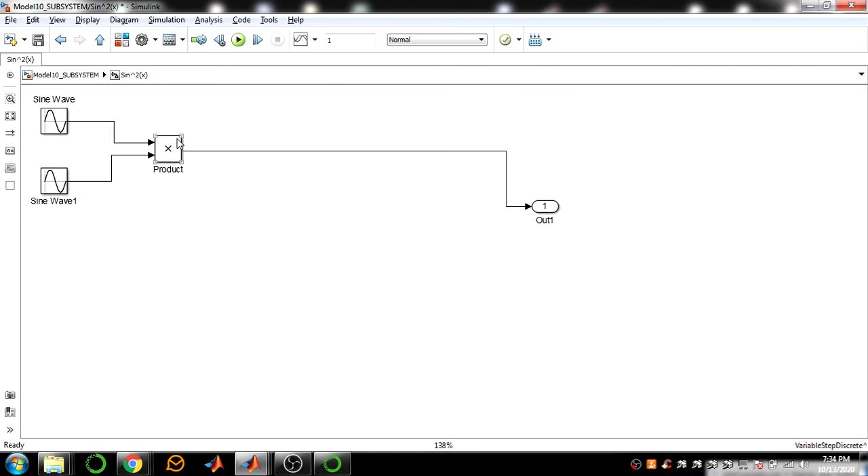Now if you have to go here and change the parameters, how many parameters do you need to change here? 1, 2, 3, right? Here I have some parameters to change. Like this, how many parameters are there? 1, 2, and here some parameters are there. So for that you need to get inside each and every subsystem.

Is it comfortable for you like that? If you're changing it, say you have some 10 subsystems, and you're getting inside all the subsystems to try to change the parameters, it's going to be a time consuming task.

Instead of that, when I double click on this sine wave block, it is asking me to change the parameters here itself, right? So with this option, if I'm on top of this block and I double click, it will ask me to change the frequency and whatever important parameters are there.

So instead of opening the block, if it shows the parameter option to set it here itself, it becomes easier for me to change the parameters, right? So that kind of option we can provide. That will be done using masking here.